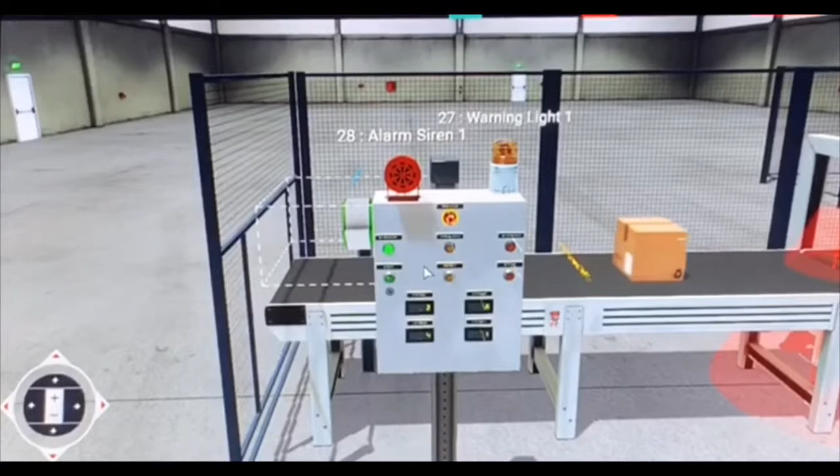Now let's look at the control panel. We have 4 push buttons: the green one for start, the red one for stop, and the yellow one for reset of our LCD counter. We have 4 counters: one for the large box, one for the medium box, one for the green box, and one for the blue box.

Hello, I am Mazenalowais, and we'll take a look into our factory project now. We'll start the project and we can see 2 blue materials going ahead. This sensor will detect the blue material, and the arm goes on, and the 2 materials go to the conveyor.

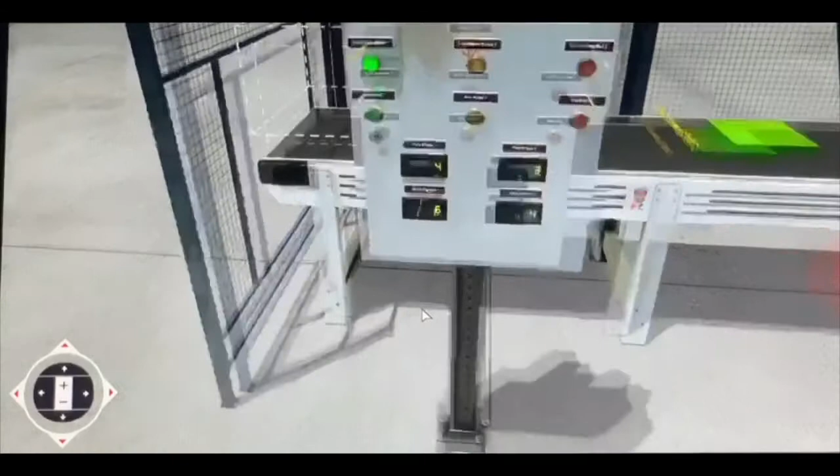And this is the program, and this is how the factory is working. We go to the control panel, we see the counters work, and we stop the project. That's it, thank you.

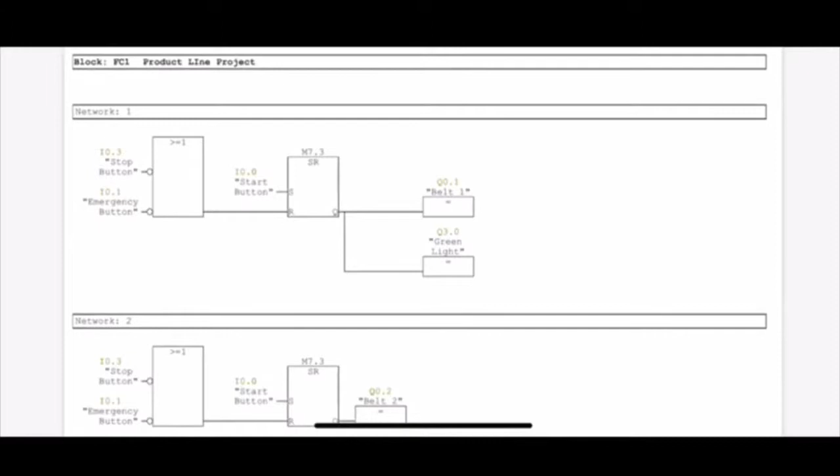My name is Mohammed Asnadi. I'm going to talk about our PLC program. First, I'm going to talk about the first 7 networks for us.

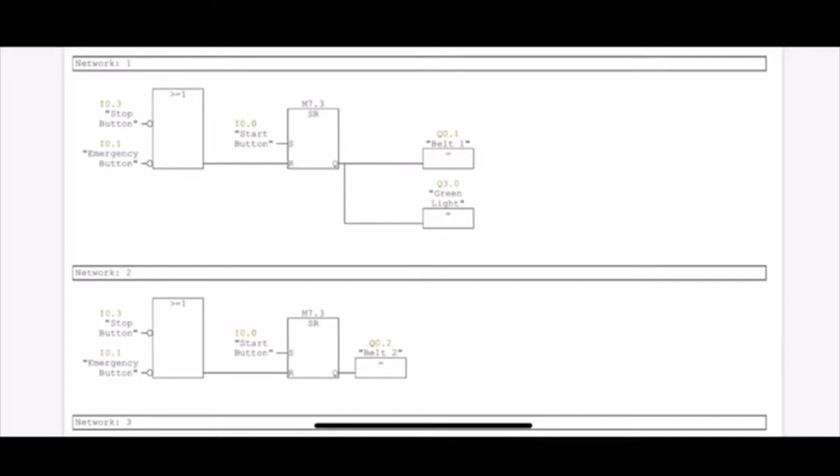It's the same function, for the belts. We separate it because we want to know if one of the belts is not working, and we use an OR gate, a stop button, and an emergency button negated because it's normally closed. For the set, it's the start button. Here we use the green light as output because when it's working, the green light will work, and the other output is the belt, using an SR latch.

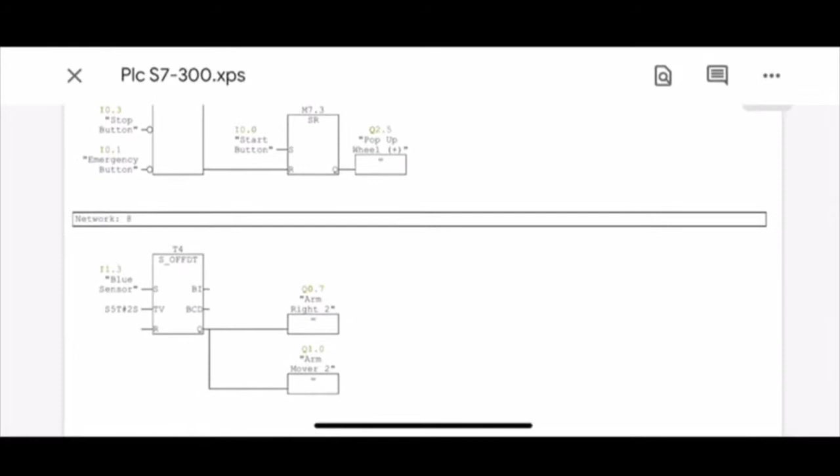Now I'm going to move to the other network for our project. Here, for the blue sensor, we use an off-delay timer, because when the object moves from the sensor, we don't want the arm to go back, so we use off delay. For the blue sensor, it's 2 seconds.

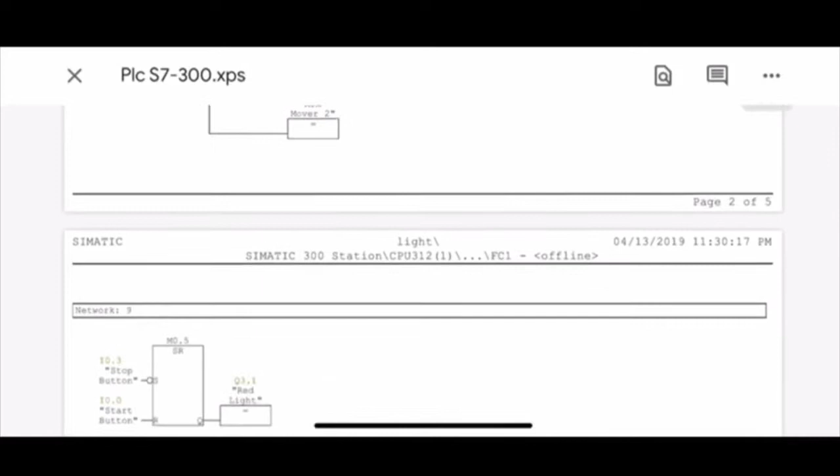In the green sensor, we use the same function as the blue sensor, an off-delay timer of 2 seconds, because we don't want the arm to go back. Here we use an SR latch for the stop button to make the red light work, and the reset is the start button.

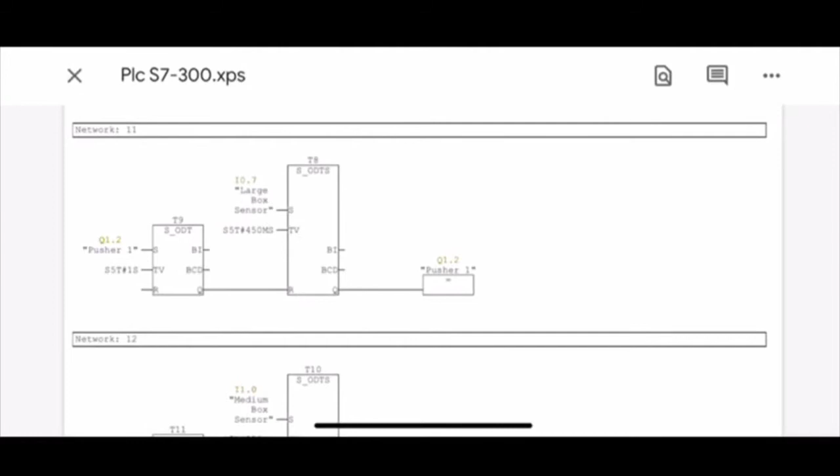Here we use a retentive on-delay timer for the pusher. When the large box is detected, the retentive on-delay works for some time until the object is in front of the pusher, to put it in the same position. For the rest we use an on-delay timer, and the input for this on-delay timer is the Q.

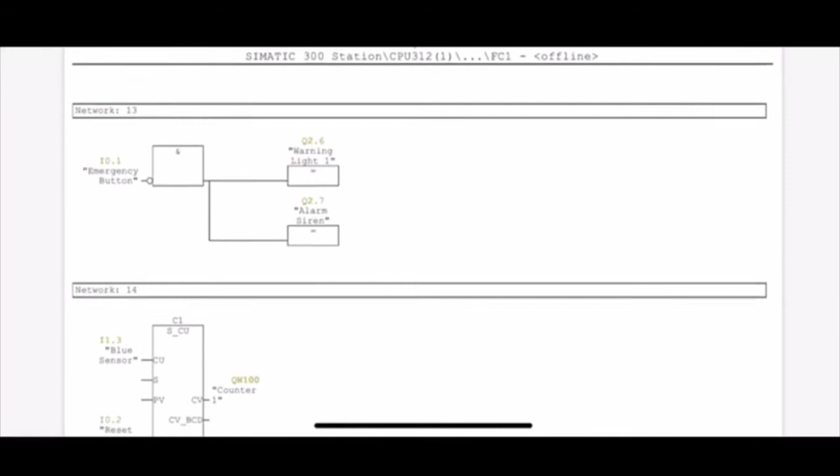Here for the emergency button, we use it for the warning light and the alarm. Here we use 4 counters for each sensor: green sensor, blue sensor, large box, and medium box. It counts up, and in the end we use the reset button for the yellow light.